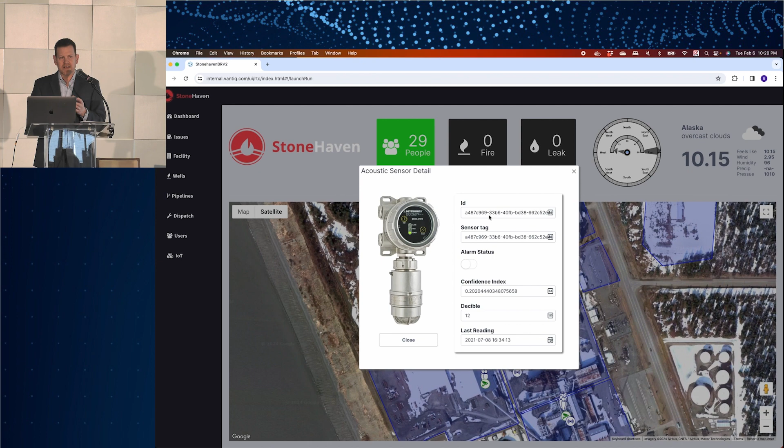For example, if I had a methane leak, the wind speed might be important in an outdoor area relative to understanding whether or not that area is safe to go into. High winds will disperse the methane gas in an outdoor area. A low wind speed will allow it to collect, creating a much more volatile and therefore dangerous situation.

We might send a robot instead of a human into that situation. We also have a number of other detection techniques here. As I mentioned, fire detection, your traditional smoke and fire detection or heat detection methods.

There is also vision going on in the back end, so object recognition. These often find smoke up to a minute, sometimes even 2 minutes faster. That's critical in safety situations.

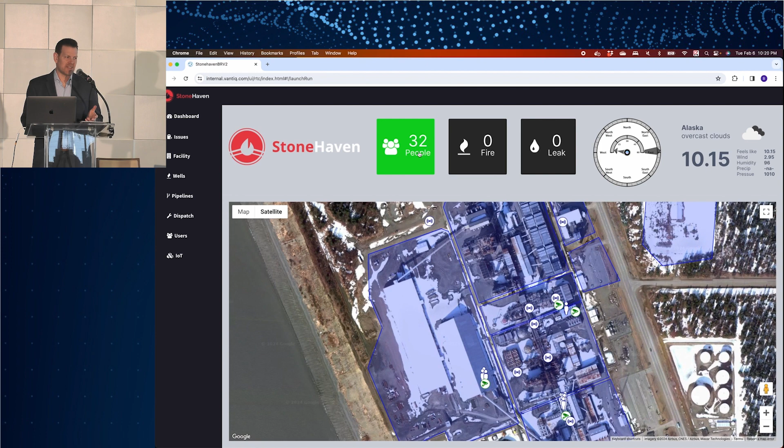And then the number that's been jumping around on the screen for the number of people is being detected by object recognition, also Wi-Fi hotspot connectivity, and mobile GPS. One of the things you see happening here on the screen is the object recognition engine identifying those 3 people, which contributes to the total number of people in the facility.

Vantiq is contextualizing that in real time, converting this really 2-dimensional XY coordinate mapping that you see on the screen into 3D spherical coordinates. In other words, it can position exactly where these people are on the planet.

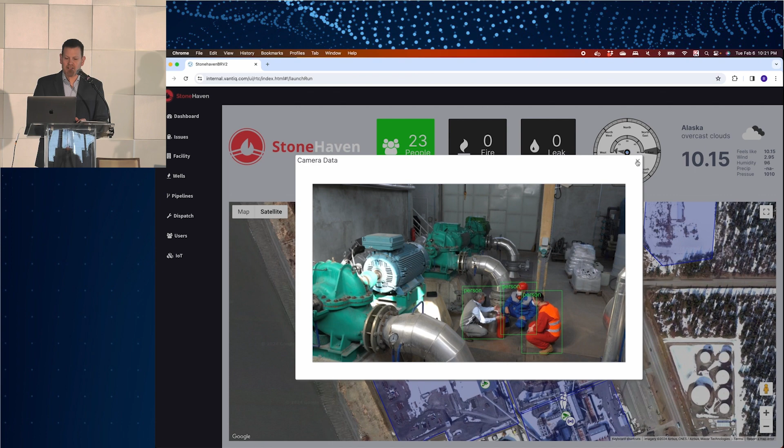When it comes to knowing where something is happening in a critical situation, we don't want to know where the camera is. We want to know exactly where the people are so that we can send emergency responders to the people, not to the camera. So we're taking that information and dynamically translating it.

But all of this has been very situational. Now let's engage the real-time engine and the generative AI to create that situational awareness. What happens when things change inside the environment?

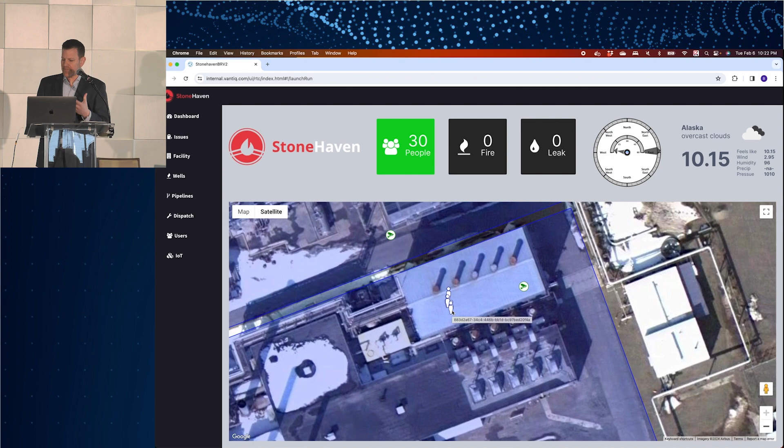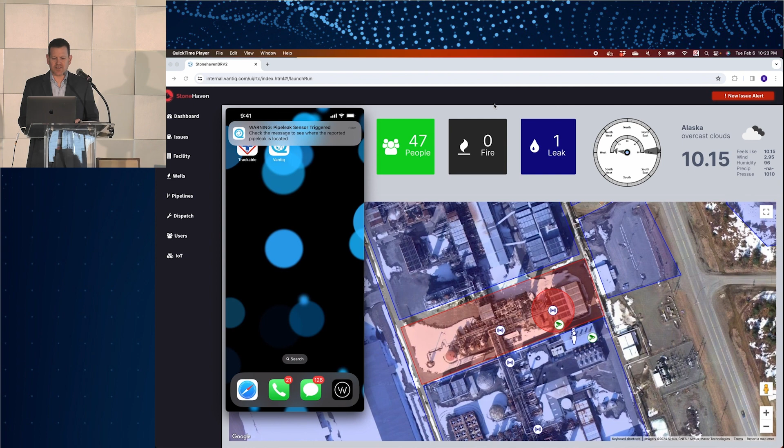I'm going to bring up my mobile phone here on the screen, and in a moment you'll see a notification. One of those acoustic sensors is going to go off, and you see it basically comes up and says a new acoustic sensor has basically just been identified. The acoustic sensor has gone off, and it basically says there's a gas leak.

This is also what we'll introduce, as I mentioned, Samantha, which is the AI assistant for the Stonehaven facility. And Samantha's basically said, I don't know what caused the leak, and I don't know what kind of leak it is.

I don't know if it's compressed air, which would be a monetary loss, or if it's methane and something more combustible. But I've notified all personnel. You're, of course, one of them.

So once again, we have a contextualization and a lookup. Who's the right person with the right skill set and the right georadius?

So the next thing that happens is I might have some questions I want to interact with this. We'll combine multiple techniques to look at retrieval augmented generative search. We'll combine in-memory understanding of what's going on at the facility at a given moment in time. And I could say something like, how many people are currently at the refinery?

And the system will basically look at that. It'll look at what it knows for our evacuation procedures. It'll look at what it knows about what's going on in the facility at a given moment in time. And it comes back and it says there's about 30 people in the facility.

So I might have some other questions. We talked about the wind speed. What's the current wind speed at the refinery? And I can continuously create this conversational element between the LLM and Vantiq, and make it look like it's all a single cohesive conversation, a single thread of information.

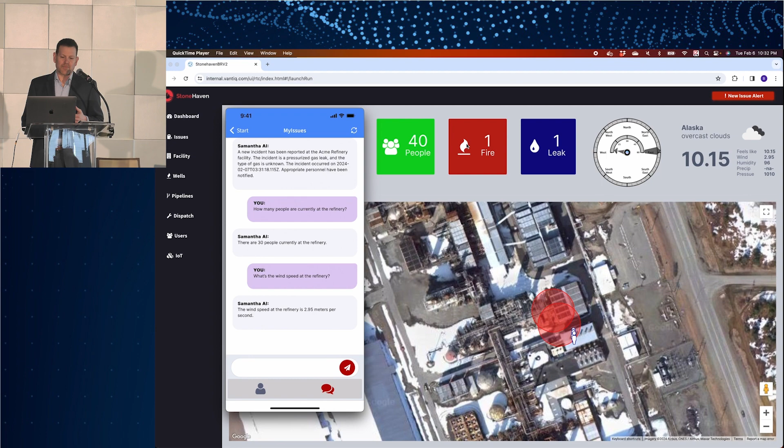And in this particular case, the system's going to break out with a fire. One of the things you'll notice is that Samantha's already responding. Samantha didn't wait for me to prompt it again, just like Jarvis doesn't wait for Tony to always ask a question. It provides information, or just-in-time information, when it's needed.

And in this case, it says, well, now I know that there's a new situation. There is a fire, it's caused by methane, and it's also said that appropriate people should evacuate. It's specifically only called for the evacuation of people in this immediate area.

How many people are near the fire? The system will come back, and we know that there's 3. We can see it on the screen there. The system will come back and say, there's 3 people near the fire.

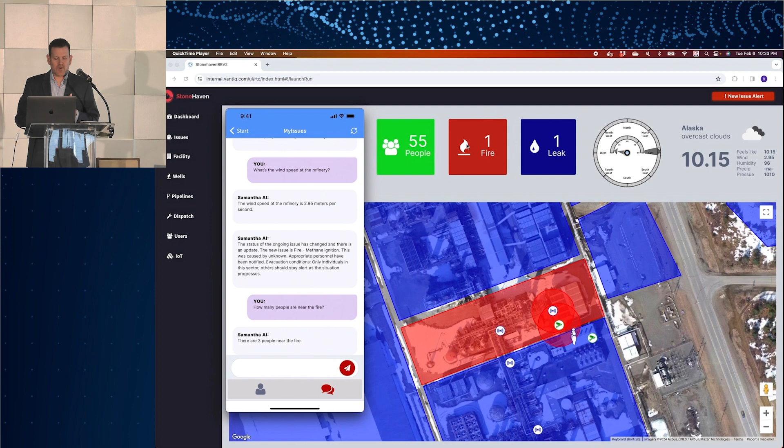I'm the safety person for this facility. I don't want to evacuate just the 3 people. I want everybody to be clear of the situation. So I'm now going to say something like, evacuate all personnel from the facility.

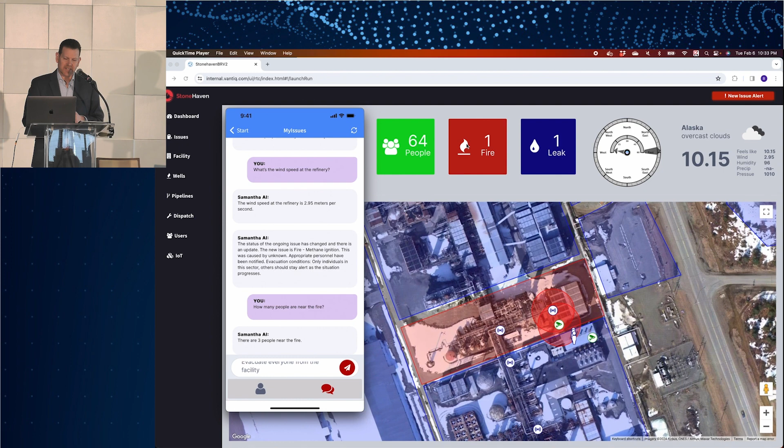This will immediately change the status of the entire facility. We'll see that every sector in the facility will turn red. All personnel will get notifications. So you see on my screen that notifications will go out.

I've now received an alert and a notification to evacuate the premise, but early on Marty talked about knowing the right place to go. This is now giving me a very specific direction in which to evacuate the premise, because it knows where I am, it knows my GPS location, it knows where the danger is, and it's asking me to avoid very specific areas.

Finally, when everything's returned to safety, I can ask the system, cancel the evacuation alert, let everybody come back to work. And the system will oblige.

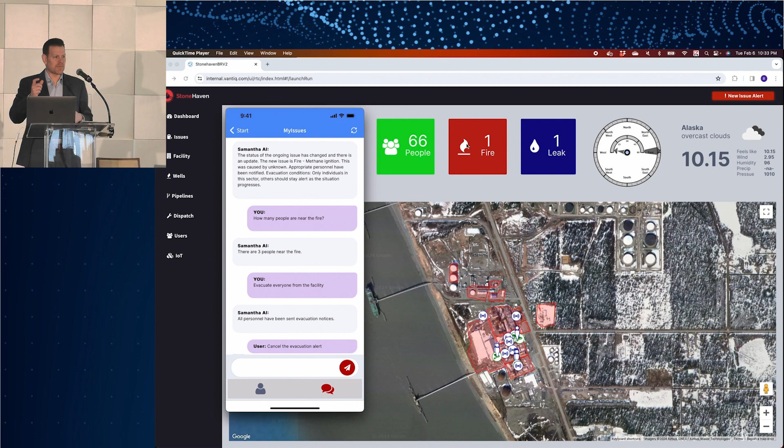And what's interesting is if I falsely canceled the alert, as on the screen here you see, of course, everything's been canceled, but if the alarms are still going off, it will then open up yet a new collaboration and start the entire process all over.